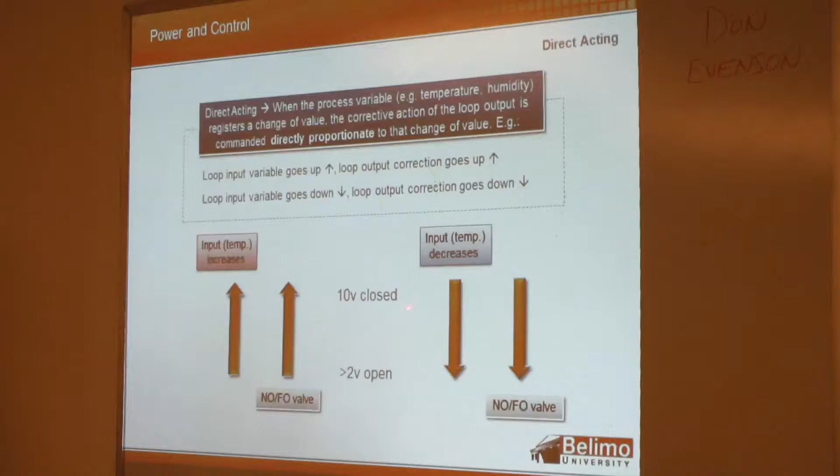10 volts, which in this case means the valve is closing at 10 volts, so that would be direct acting. Reverse acting would be a case such as this, shown with humidity. As the humidity is increasing, the voltage is decreasing because it's a normally closed valve and we're going to the open position on the valve.

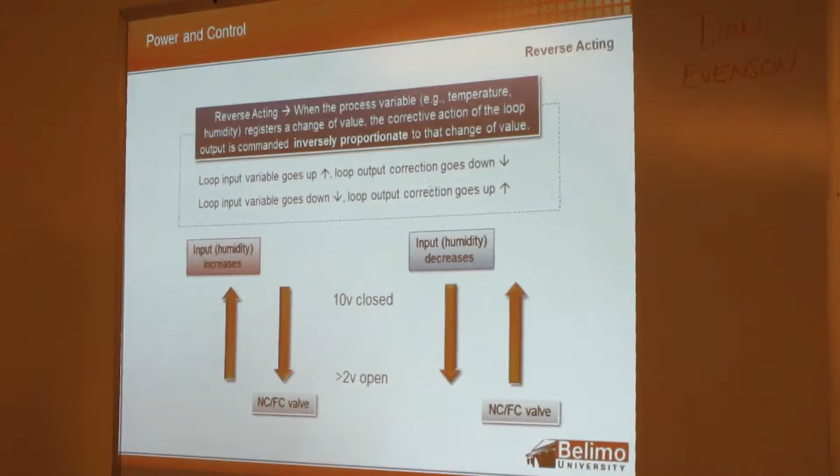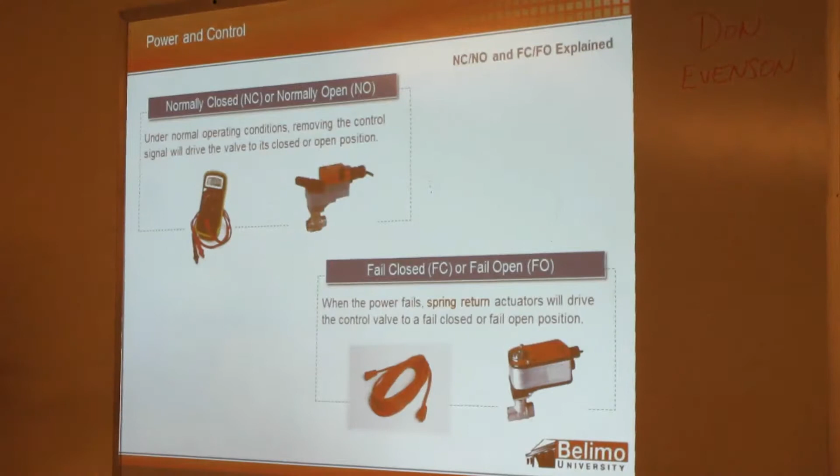So here we talk about the same thing we were talking about earlier. This works the same on valves as it did with the dampers - normally closed, normally open versus fail closed, fail open. I don't think we have to go through that whole scenario again, it's the same as what we talked about earlier.

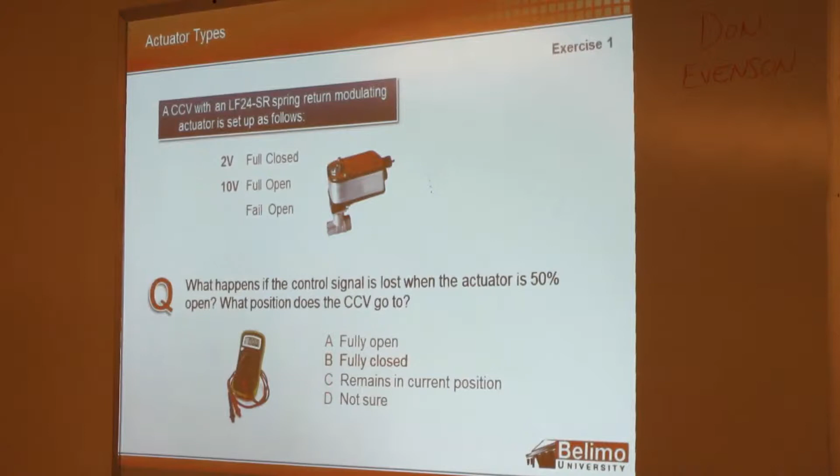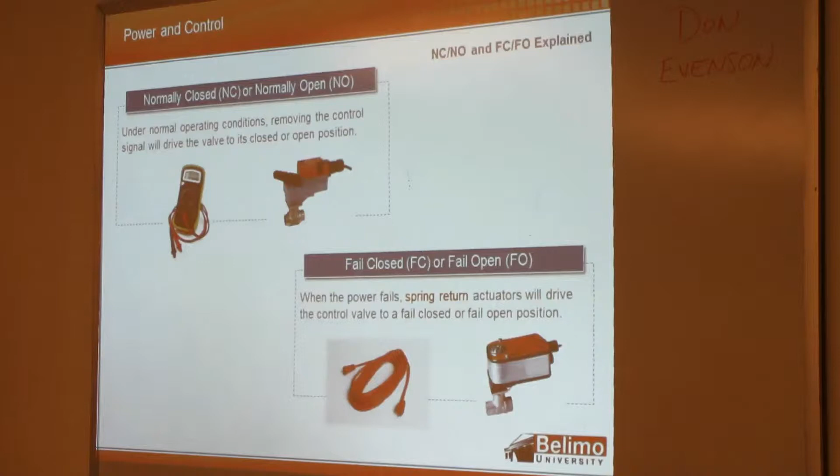Brian, do you have your notes to make a note of that? Which way were we making a note of? They're under the valve stuff, going through that same normally closed, normally open. You don't want to do it again? They're all pretty much the same slides, I don't think we really need to do the same thing over again. Corporate may want to change it, they may not, but I will be taking it out of my presentation.

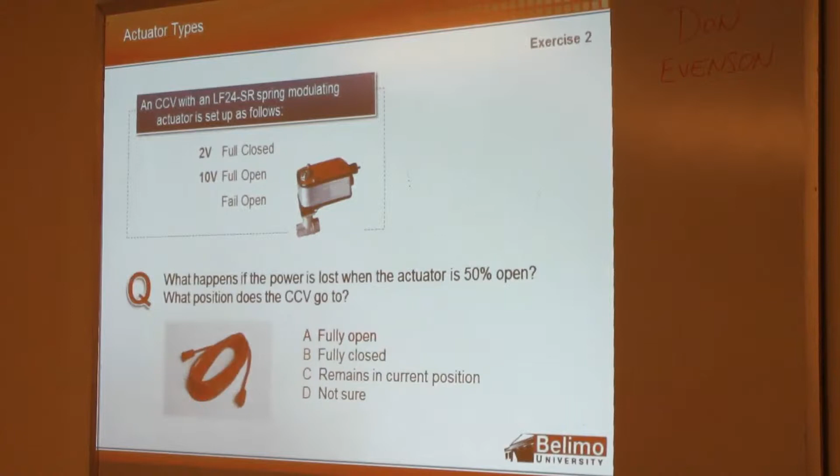Unless I see something going through here that looks different, but so far it all looks the same.

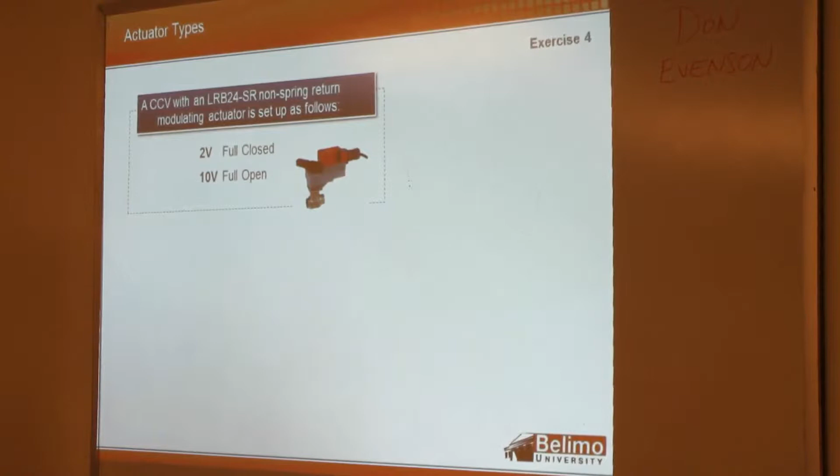The 6-way does not label AB ports, it's not labeled like that. How's it labeled? It's not labeled at all. Good luck, figure it out. What's it called?

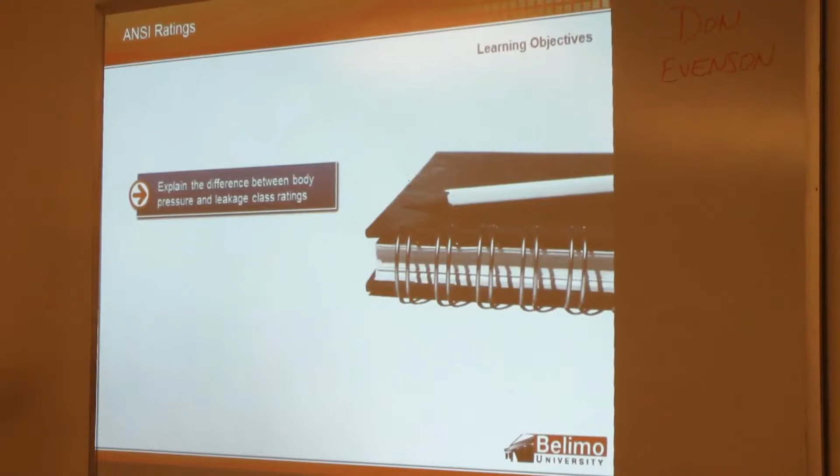ANSI ratings - this is something new to this presentation, going through the ANSI ratings. We don't do a lot of talk about it, but talking about the difference between body pressure and leakage class ratings.

ANSI 125 versus ANSI 250 - those refer to the flange dimensions and the bolt holes.

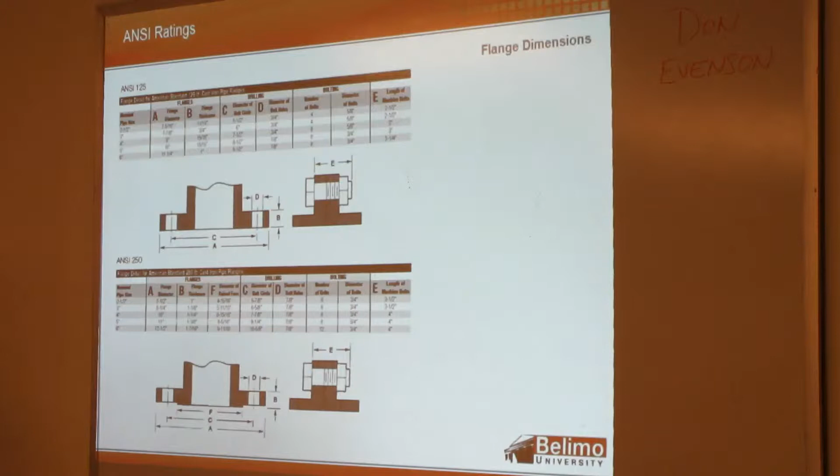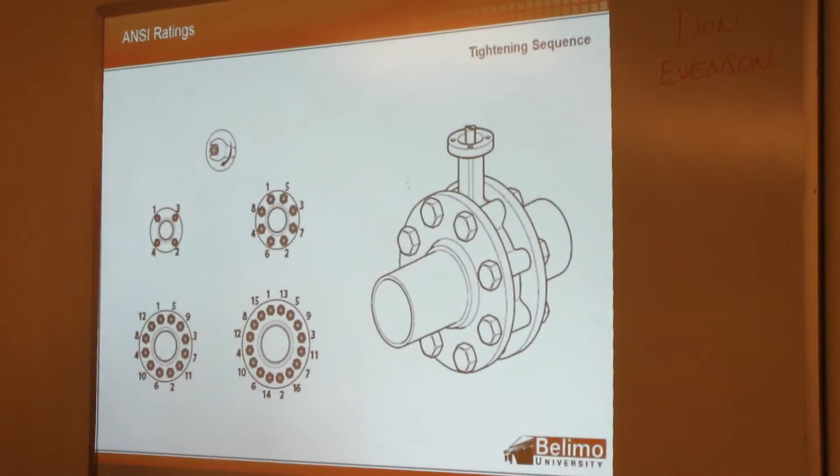That's really all I have to say about that portion. You can see here with the different flanges, the slide shows the tightening sequence so that you get a nice tight seal on the valve. Because if you tighten all these bolts up here, then you're going to be leaking down here. So it's better to move around and tighten around rather than just every one as you go.

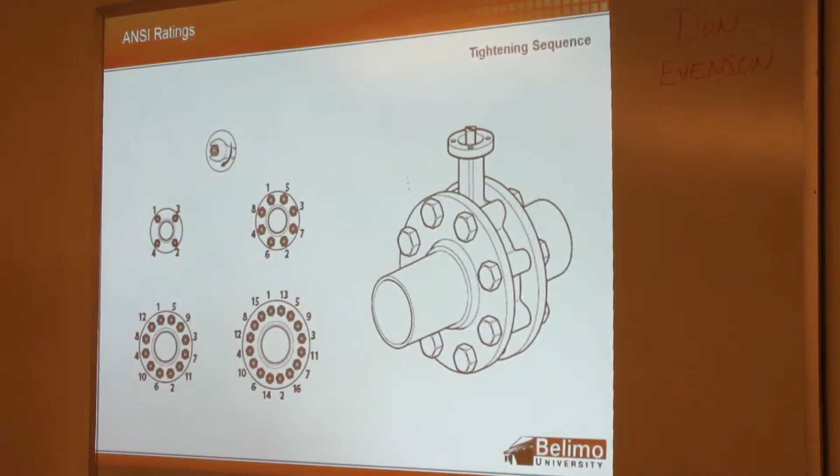ANSI body pressure ratings - see here, class 125, class 250, class 150, class 300, and the different temperature ratings associated with those.

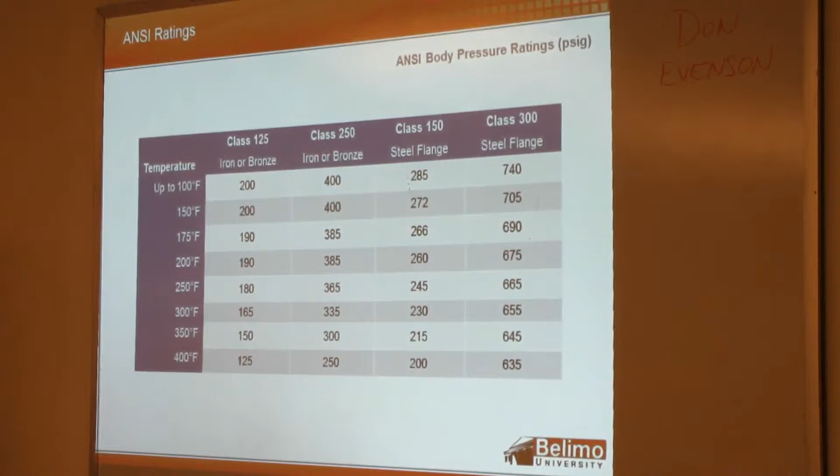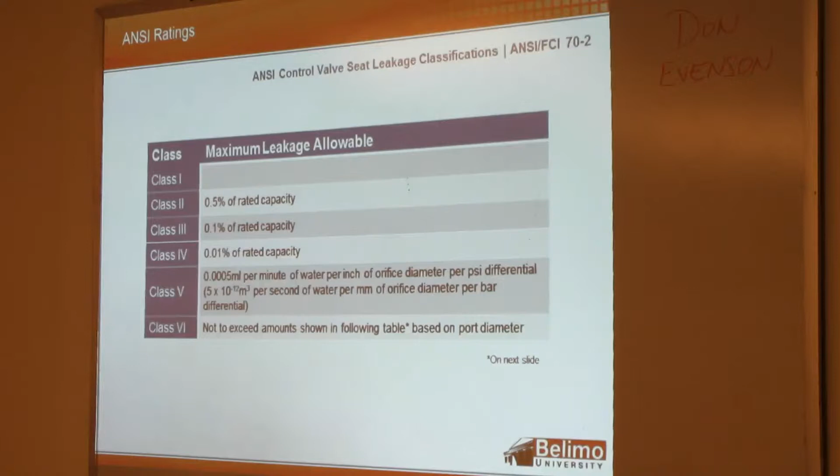Leakage rates - typically we're going to be looking at ANSI class 3 or 4. That's what most manufacturers use as their ratings for leakage on valves. Now if you really need less than that, you've got your class 5 and class 6, and then you're getting some really expensive valves to do that kind of tight control or tight close off.

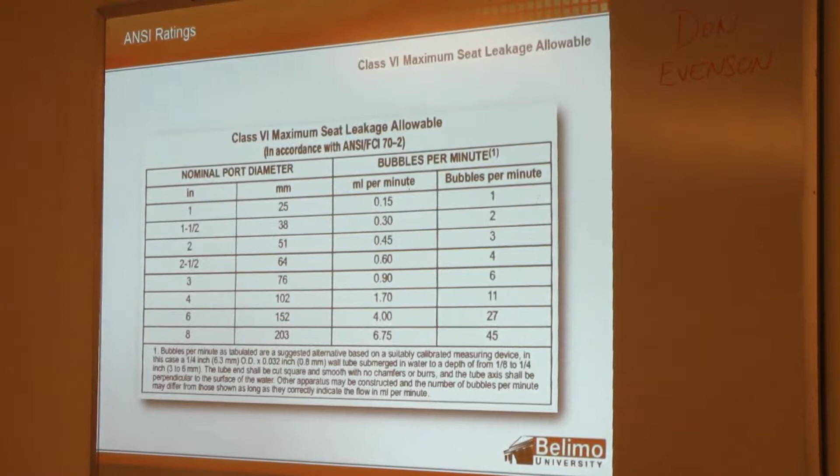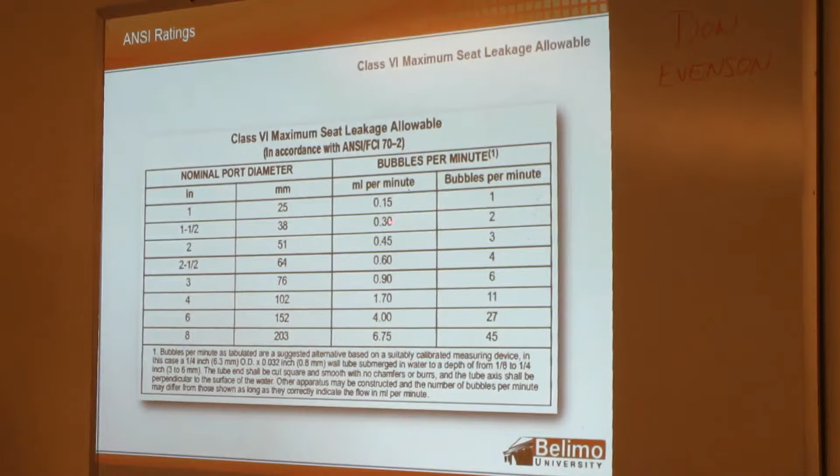So class 6, maximum seat leakage allowable - see how minuscule it is. On a 1-inch valve, 0.15 milliliters per minute - that's not a lot.

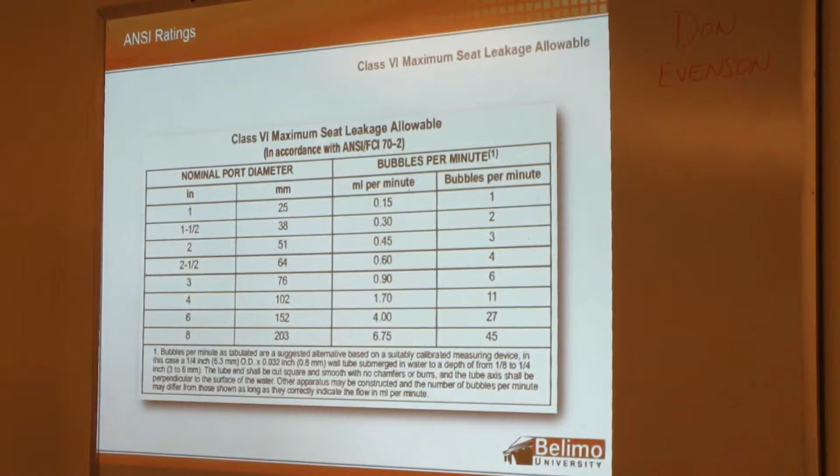So that was the real brief introduction to ANSI classes. Any questions on that? I went through it quick. It is what it is, really.

All right, now we're going to talk about valve sizing for pressure-dependent valves. How many people in here have to do valve sizing? Okay, that's Bob's job. I might go a little bit faster since there's only a few of you, but we'll talk a little bit about this stuff.

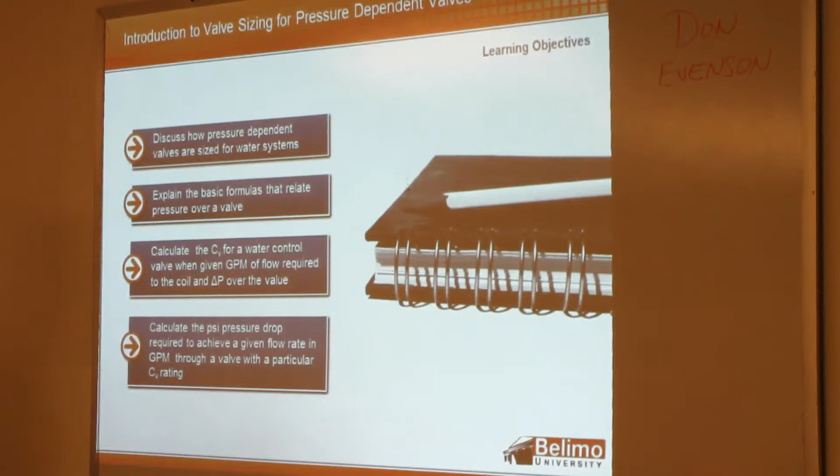One of the things I'll say is that we have that Select Pro sizing and selection software - if you don't already have your own Excel spreadsheet or whatever set up to help you do your sizing, the tool is a nice way to go. So, step-by-step process: you calculate your CV, select your valve, and so forth.

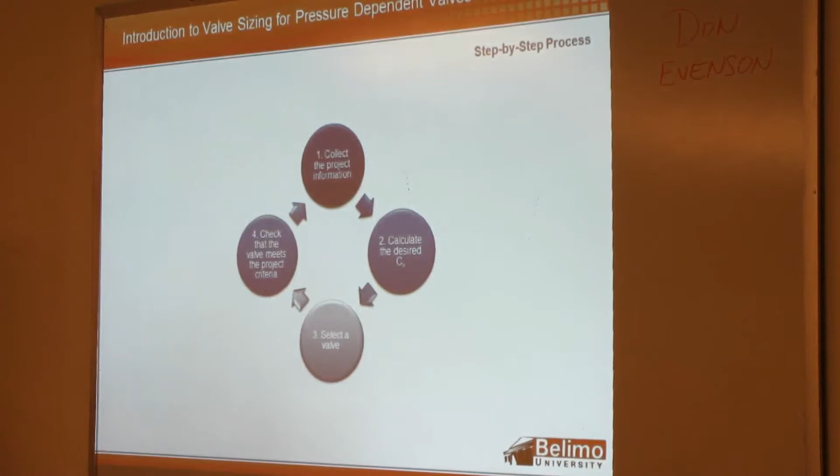What kind of information would you like to have? Well, you want to know what the application is, what the media is, what kind of close-off pressure, two-way or three-way. Some of this information you rarely get, but you certainly need to know if it's two-way or three-way. If it's three-way, is it mixing or diverting?

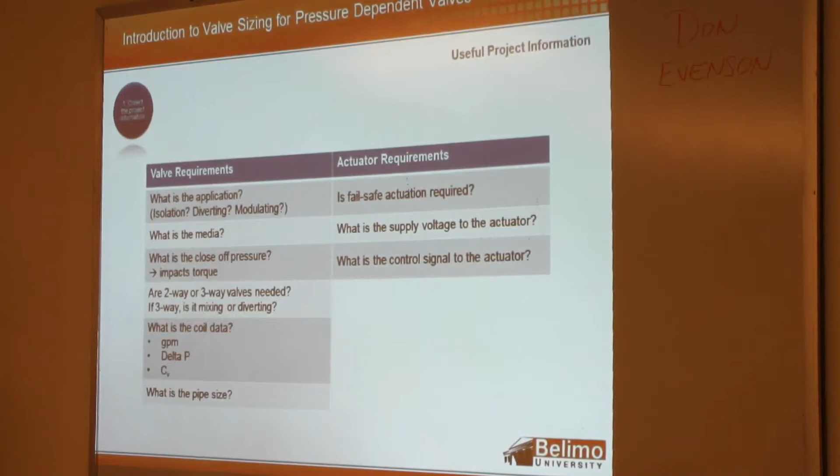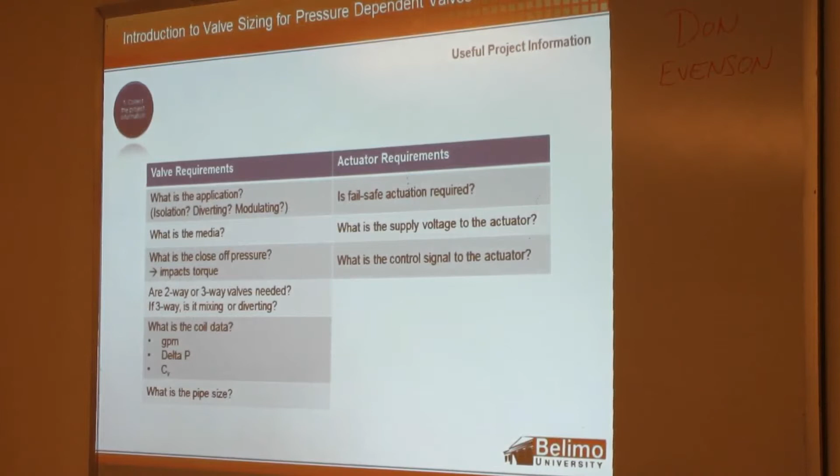What's coil data? It's GPM, the delta P, and then you can calculate the CV. As a rule of thumb, if you're trying to calculate for a modulating control valve, just cut the GPM in half, assuming you know the GPM. Reason being, the formula for calculating CV is GPM divided by the square root of the pressure drop.

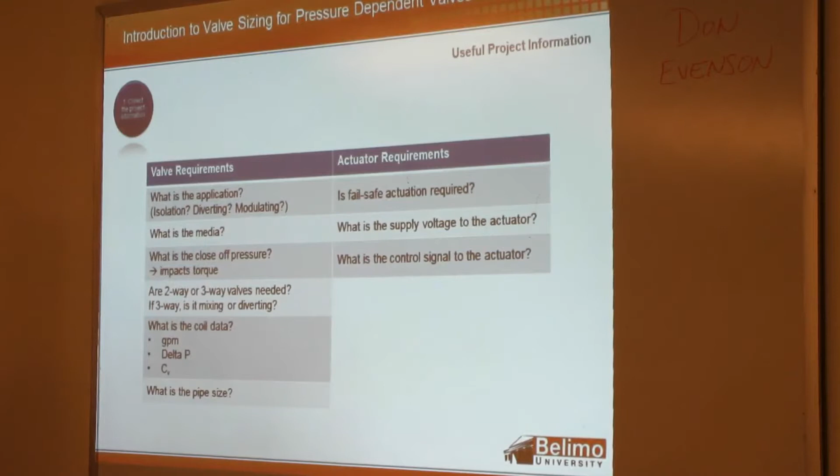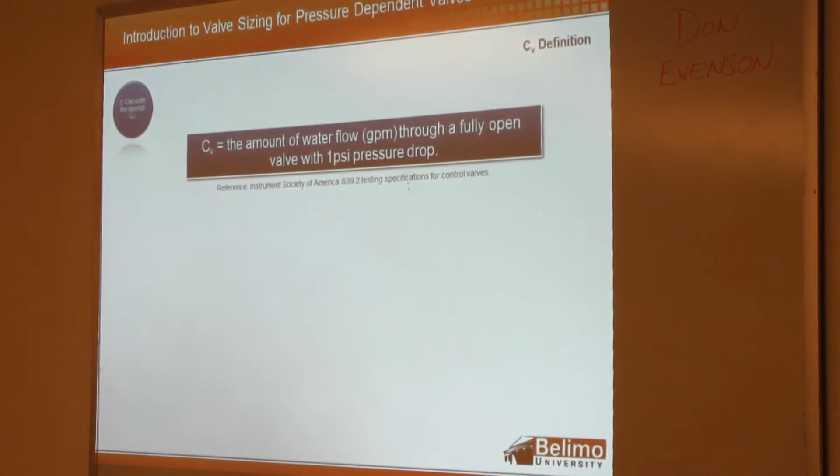This is one of ISA's definitions. CV is amount of water flow in GPM through a fully open valve with a 1 psi pressure drop. It's also at 60 degrees as far as the temperature goes.

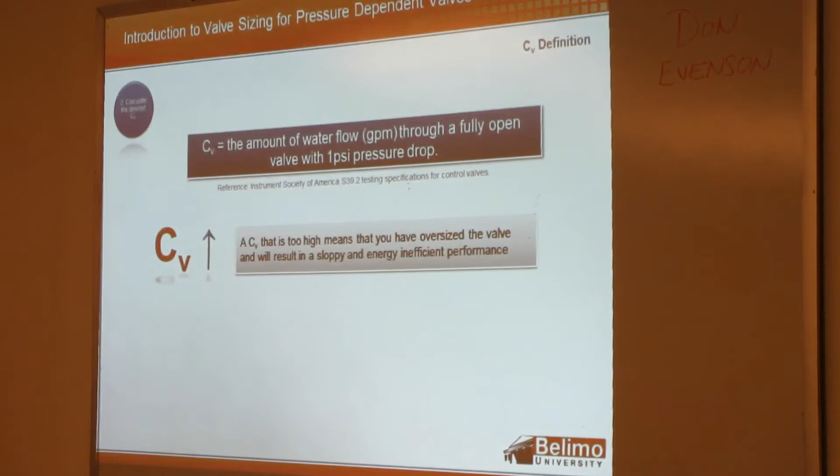So if you have a CV that's too high, it means you have an oversized valve. You're going to get sloppy, inefficient, and energy-wasting performance. If it's too low, it could result in insufficient flow and you can starve the coil.

When we're sizing control valves, we always go a CV higher than what the calculation is if it's not exactly on. So for example, if we calculated a CV of 4, with Belimo our half-inch valves go from a 3 CV and then the next one is a 4.7. We're going to go with the 4.7 CV to make sure we're covered and not going to starve the coil.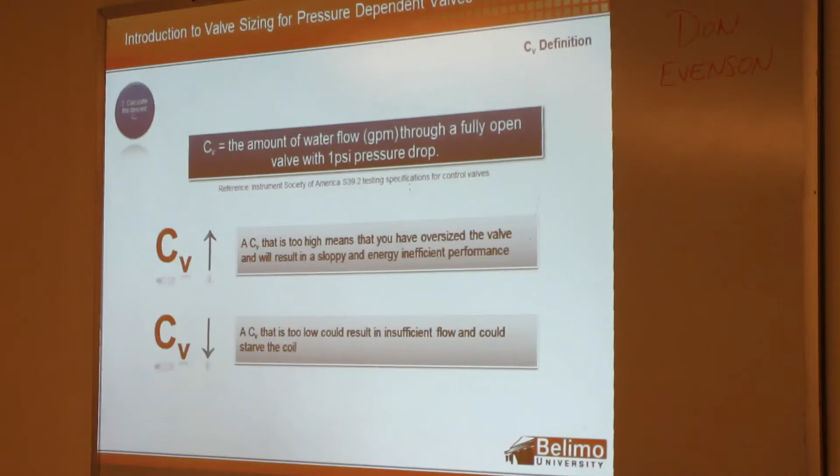This is the formula I was talking about, GPM divided by the square root of the delta P. So as an example, valve must pass 40 GPM with a delta P of 4. What's that CV going to be?

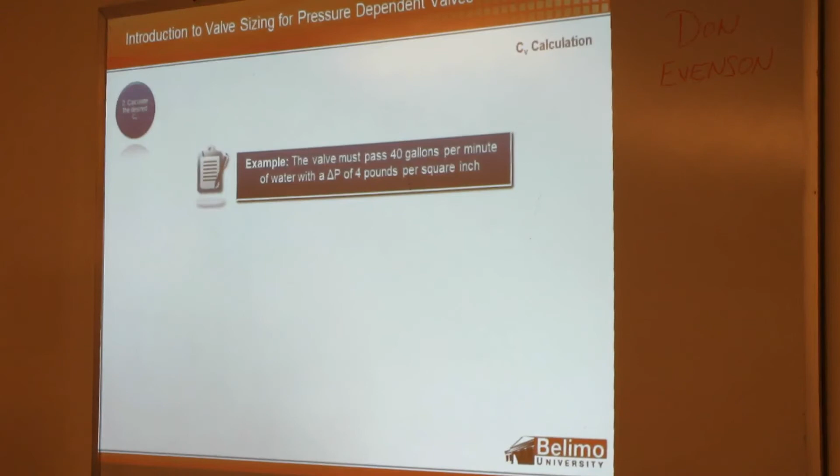A quick test in the middle. Yep, I heard somebody said 20. 40 divided by the square root of 4 is going to be 40 divided by 2, or 20.

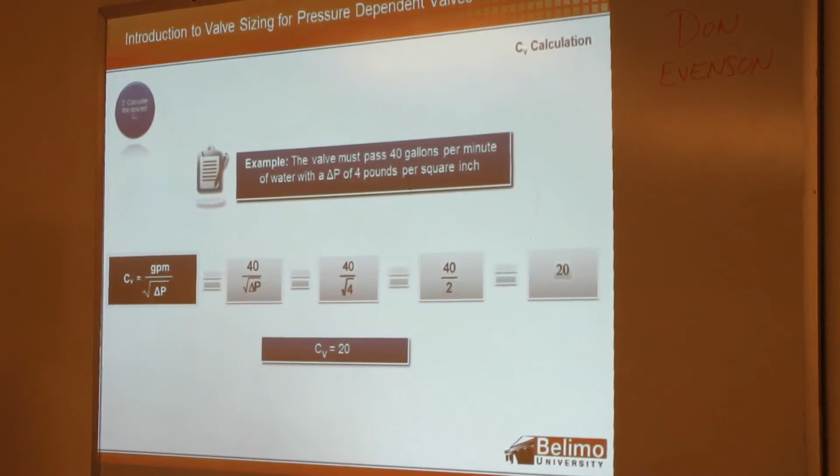We won't go through the exercise here, I'll just talk through it. So if you have a GPM of 17, delta P of 4, CV is 8.5. 90 and 4, CV is 45. Then 825, but with a drop of 3 pounds, then you're going to get a CV of 476.